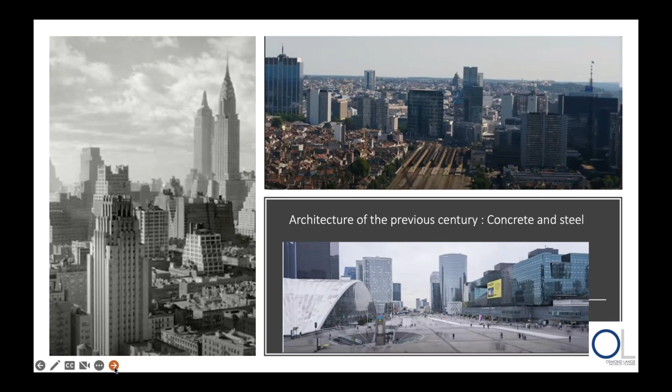These buildings cannot reach zero carbon status in itself and relies on carbon offset schemes elsewhere to improve its rating. So if the industry keeps on producing buildings such as these depicted here, that is, carry on with business as usual, the building industry's lack of attention to global warming would amount to sheer ignorance.

So what building sites should look like in future is this: a fairly new way of building with wood, where the walls, floors and roofs are all wood. This is a construction method that will make a meaningful impact on curbing global warming. So we're going to explore this in the next few minutes.

The reason that this works is quite simple. Trees sequester carbon through photosynthesis and use it as building material for its structure. 50% of wood is carbon. And those of us with carbon fiber frame bicycles will know that using carbon in the structural mix makes for a very light and strong material.

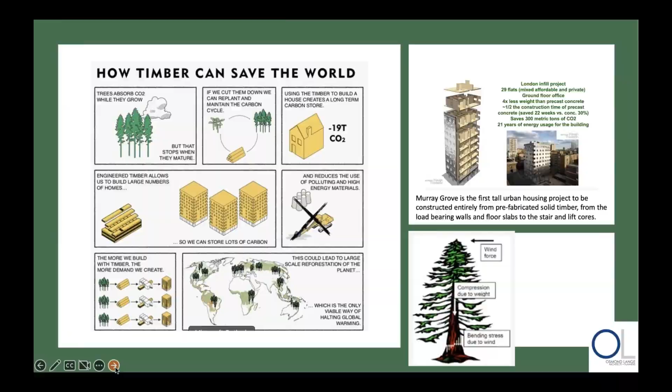To conclude on the sustainability aspects, timber construction addresses the United Nations Global Sustainability Development Goals, promotes development of our forestry industry, creates a new material production industry, and offers wonderful buildings to occupy. It is safe to work with, saves on foundation costs, is 30% faster to build with, and offers a crisply accurate structure. It also streamlines the architectural to production process, as 3D modeled drawings convert directly to the panel and cutting software when applying building information modeling, or BIM, principles.

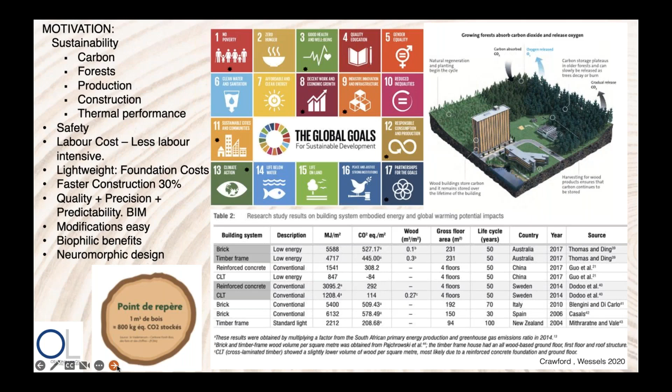The use of timber in buildings in South Africa is not entirely new. The laminated beam industry has been around for decades, as has knotty pine ceilings and shiplap-clad timber frame beach houses. So general skills to work with timber exist, and the adoption of a new timber technology is therefore quite plausible.

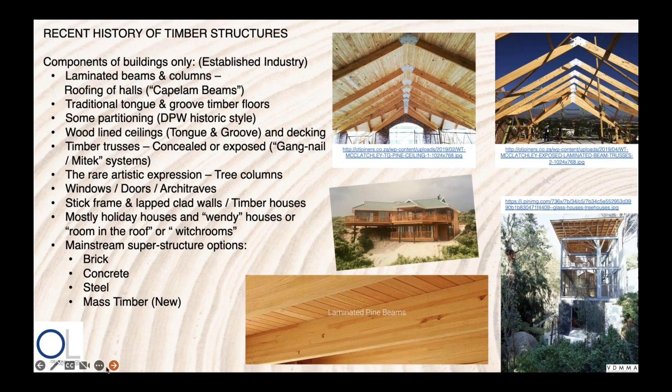However, we are talking about a new product now called cross-laminated timber, which forms one component of mass timber constructed buildings. CLT sheets are made up by gluing timber planks together in 90-degree opposing directions for each layer to form sheets. The sheets are screwed together on site to form the cellular structures that enclose space. Floors, walls, soffit, and roofs are all made of the same product.

It started in Austria in the early 90s with a PhD by Gerhard Schickhofer that was put into practice and has since spread across Europe, America, and Australia. South Africa has a manufacturer, a company in Cape Town called XLAM, and another one is opening soon in Atlantis.

Universities such as University of Stellenbosch and Pretoria are researching this material extensively. The government has taken note, and the Department of Trade and Industry is sponsoring training and other initiatives. The South African Sawmilling Association is also on board. It is an open and democratic new industry starting up, and anyone with any applicable skill is welcome.

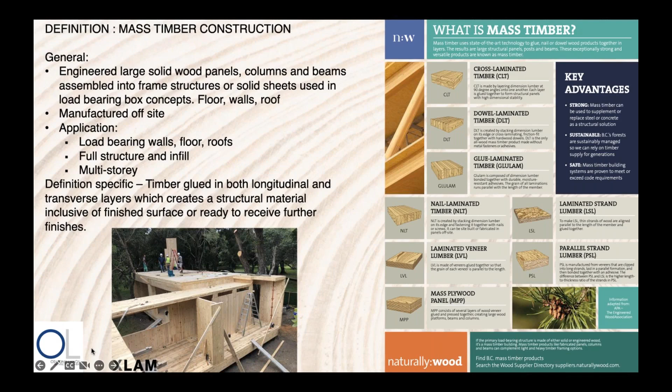Internationally, the trend is, however, to build taller buildings after the International Code Council accepted a classification system for these structures. The system puts it into different fire risk categories depending on the occupancy and escape rationale. Initially, buildings only had a rationale that worked up to 8 stories, but subsequent development now puts it at 18 stories.

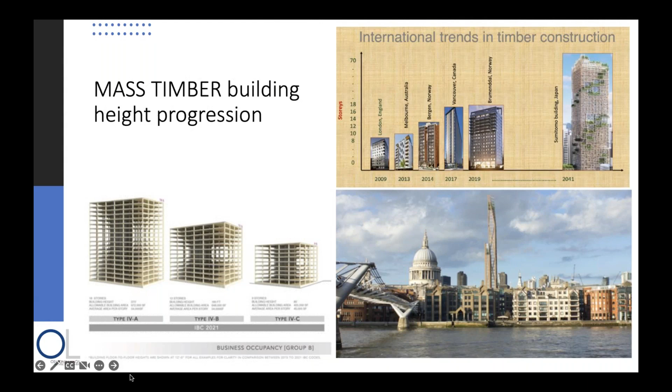So, having spoken the word fire, let's move on to fire. Extensive studies have been undertaken abroad, and the findings all conclude that a 60-minute and up to 120-minute safe building is achievable using CLT. The solution lies in working with the charring rate of the timber.

The char layer that forms on the surface during fire protects the inner layers up to a point in time. The same principle as intumescent paint that carbonizes and protects a steel structure that it was applied on.

So to achieve the time required for stability and integrity, extra sacrificial layers of timber are added. The thickness needed is determined by the expected fire load and resultant time to burn through. X-rated gypsum board cladding is also used as an alternative or in combination with timber sacrificial layers.

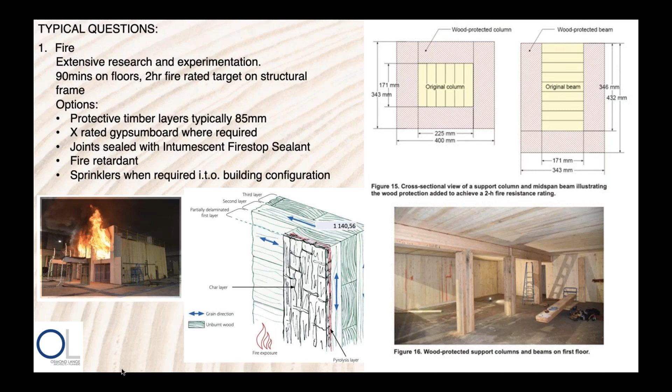And seeing that we are into immediate questions that you might have already had coming up in your mind, let's talk about cost. In a University of Stellenbosch study, comparing a concrete building to CLT in South African conditions, it was found to be only 10% more expensive, taking all aspects into account, especially the speed of construction.

Services are fully pre-planned and coordinated in the BIM model and is then a plug-and-play situation on site. Generally, a 30% overall time saving is usually achieved compared to conventional construction.

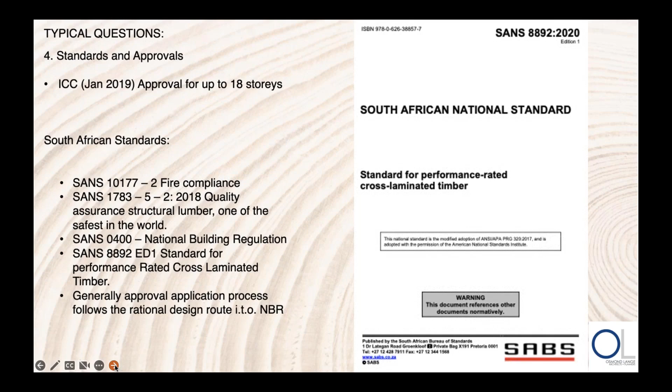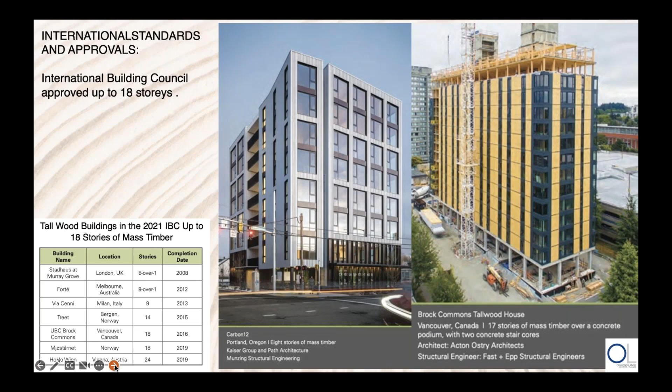The other question, of course, is timber rots, so wood preservation is an obvious concern. The first line of defense is to design the structure to stay dry or to dry out rapidly, especially at the lower levels. External facades are typically clad with a waterproof material of the architect's choice, in addition to preservation.

Universities are undertaking studies in the use of different preservatives with South African wood. For CLT, SA pine and eucalyptus is most commonly used.

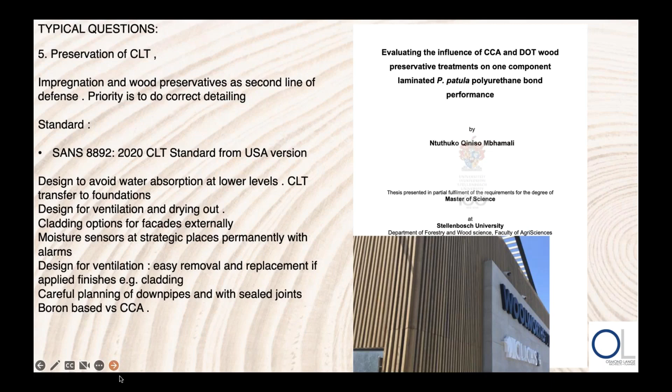The adoption of CLT will be enhanced through various interested parties attending courses and training on different aspects, from design to construction. There is also talk in the industry of getting a private sector-led organization going for information sharing, ensuring standards are met, and to promote learning. This would be similar to the Concrete Masonry Association, or AAAMSA, in the aluminium window and door industry.

So how do we as architects learn how to design CLT buildings from concept to assembly? Publications internationally are free and plentiful. An open source community exists worldwide that you as an architect can tap into. Courses are presented by overseas suppliers, and one of our architects, Carla Jooste, attended such a course in the Czech

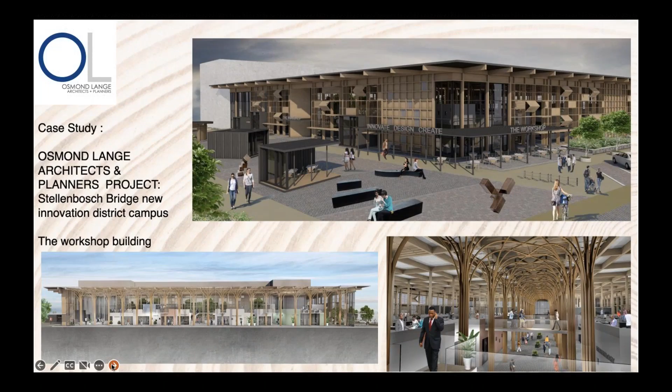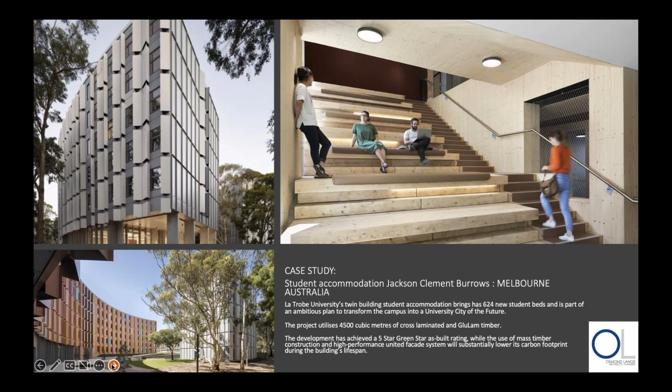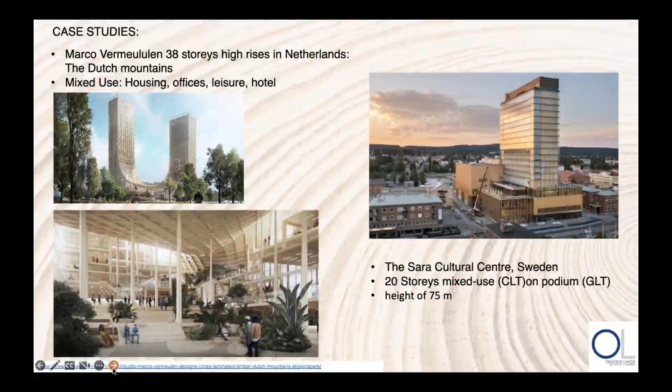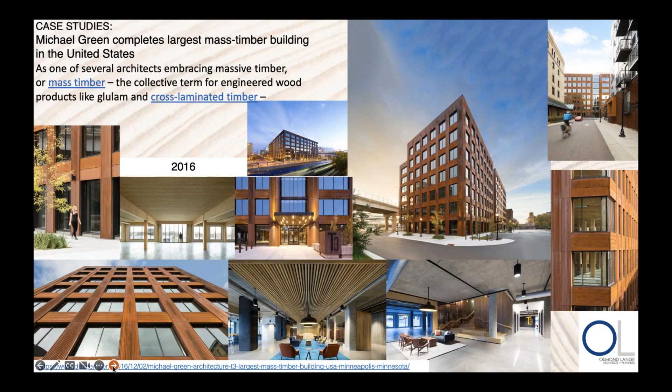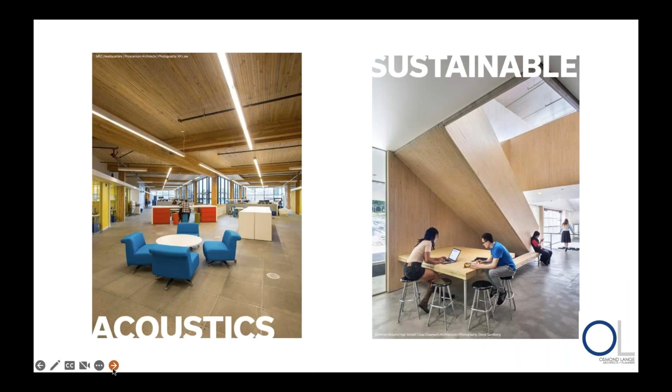So at a conceptual level, what does this material offer an architect? It creates a warm building that is inviting. It's modern. It addresses acoustics. It is sustainable, lightweight, innovative, and versatile, calming, and flexible. So from a design point of view, the architect's imagination can do wonderful things with this product.

We, as I mentioned, are busy with this workshop building, as we call it. This is the interior of it. That is also banking on the concept that in terms of neurological design, a natural environment for people to work in improves their output, as you can see on the diagram on the right. So it has been found that people working in an interior with wood and plant finishes perform better than in a grey and concrete environment.

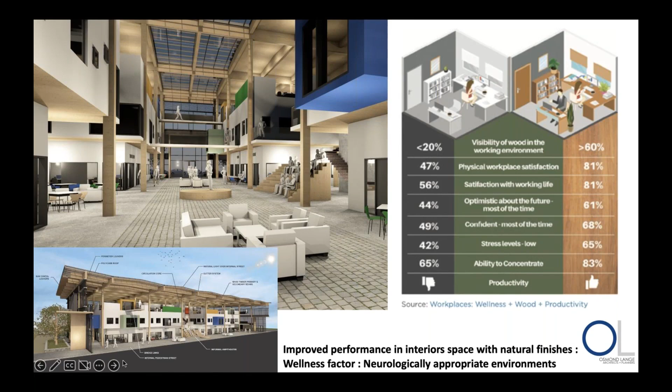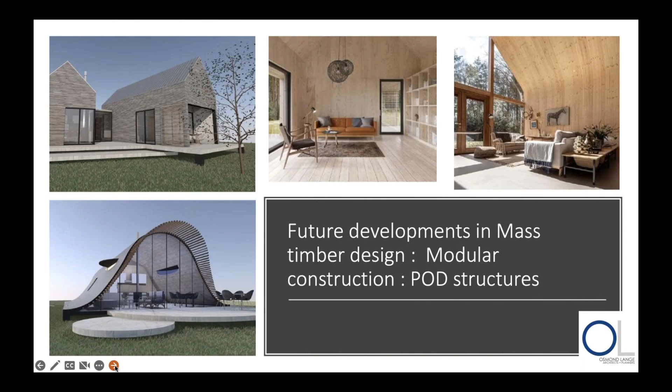The future development where CLT construction is heading is to also incorporate the principles of modular construction, so that more elements are pre-manufactured and installed inside modules before going onto site. In South Africa at the moment, with the building regulations hampering the process a little bit, there's an emphasis on cottage design or smaller structures. So these are examples of work we're doing for a farm in the Winelands, looking at options for visitor accommodation, cottages.

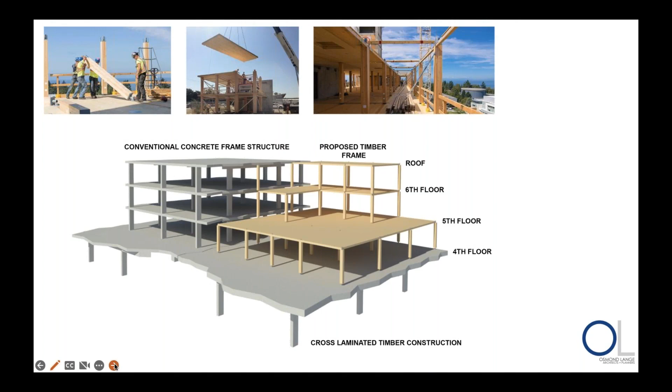This project is the Granger next to the 2010 World Cup Stadium in Greenpoint. It is a mixed-use development that we're busy with. And the idea there is that on the upper levels, some of the floors be done in CLT, as opposed to going the whole hog and starting all the way from the ground. We don't think South Africa is there yet. This project, however, pushed the limits already. On the left-hand side there, you see the new Deloitte building in the V&A Waterfront, where Arup designed these CLT facades spanning over 2 stories, and look, quite a successful outcome.

So, in wrapping up then, we've looked at the history, the international context, advantages, how to learn, how to use it, sources, resources that are available to you. So from an architect's point of view, there's no real remaining reason not to get involved, and everybody is invited.

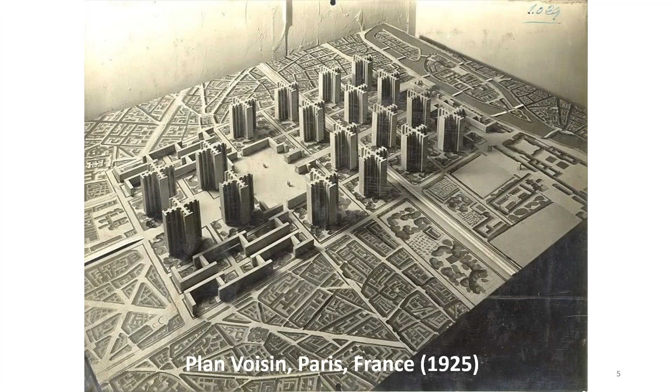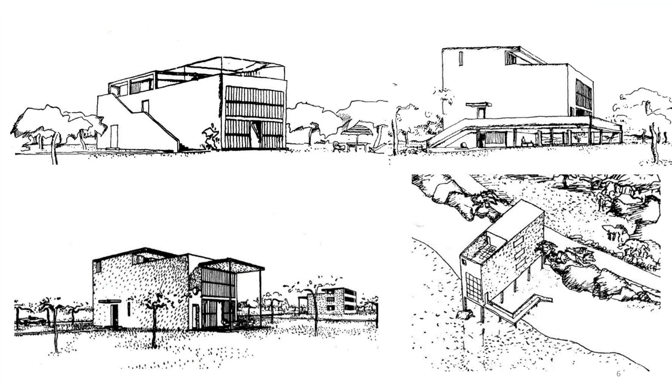We will always write about Le Corbusier, since he confronted design issues that are increasingly relevant today. Le Corbusier has been continuously attacked for his city planning, such as his Plan Voisin for Paris in France. There he proposed that part of the historic city be demolished for his towers in a park. In 1927, he coined the phrase, "A house is a machine for living in." This statement has been misinterpreted ever since. His critics claim he proposed a sterile, robotic setting. But as Le Corbusier explained, I quote, "Baths, sun, hot water, cold water, warmth at will, conservation of food, hygiene, beauty in the sense of good proportion." That is what he had in mind.

Le Corbusier was the undisputed leader of the modern movement in architecture and articulated the only cohesive theories for its implementation. These are the 5 points for a new architecture and the 4 compositional systems. But I'm sure many of you are wondering, how on earth am I going to connect Le Corbusier with regionalism? Let me explain.

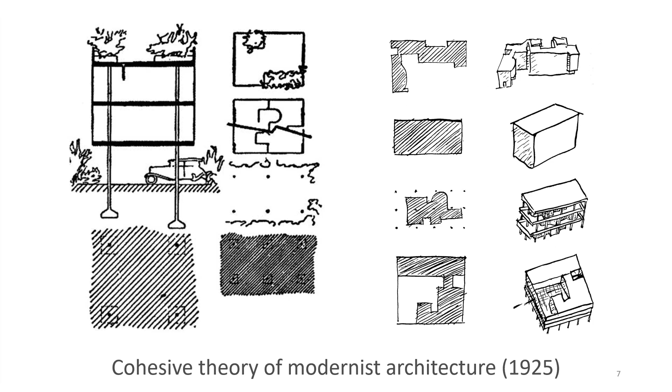Writings on regionalism have been with us for a long time. However, the term critical regionalism was only first defined by Liane Lefaivre and Alexander Tzonis in 1981, 16 years after Le Corbusier's death. The theme has been addressed in a number of important publications, a few of them even exclusively dedicated to critical regionalism. It must be emphasized that the elements of critical regionalism are not well understood. Somebody once wrote that critical regionalism is a theory many architects and their clients might approve of, if only they could remember how to define it.

Diébédo Francis Kéré, born in Burkina Faso, is one of Africa's best-known architects. He is the 2022 laureate of architecture's highest honor, the Pritzker Architecture Prize. His definition of critical regionalism is straightforward. I'm going to read this with you. Critical regionalism is the use of innovative approaches to create an environmentally responsible, climatically sensitive, and culturally embedded building.

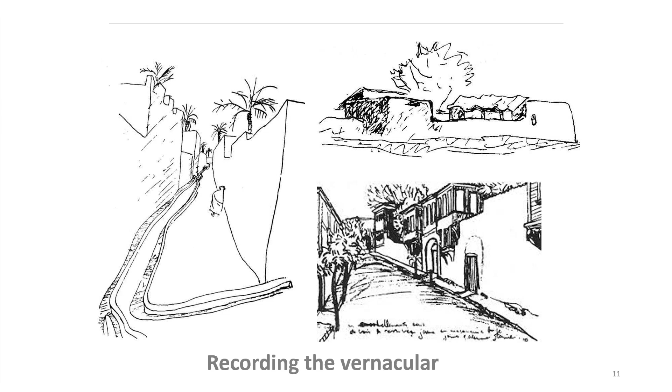Out of the many possibilities, I selected the following case studies. A compound on an agricultural estate in Cherchell, Algeria. Cluster housing at La Sainte-Baume near the French coast. And a new hospital in Venice, Italy. Since they were not built, they have not been subject to the same analysis as his built projects. They are probably also not well known to practicing architects and technologists. I must confess that my choices were rather opportunistic. I really like these projects.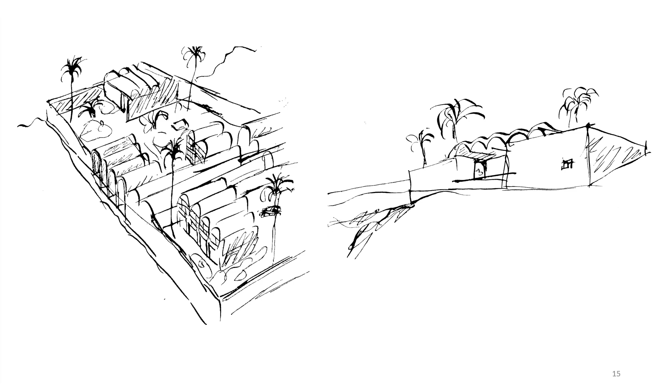Although the drawings are quite rough, it is clear that Le Corbusier developed the design in considerable detail. According to him, quote, the design was based on the interplay of spaces and solids and was intended to reduce the problem, as he put it, to the most fundamental forms of Mediterranean tradition. The section through the compound.

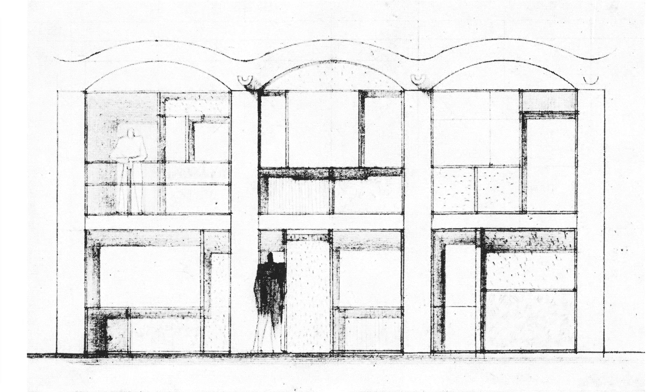Designed in 1942 during the Second World War, there were no specialized craftsmen and building materials were almost unobtainable. For those reasons, it was intended that the building should be constructed by local labor and that local stone should be used for columns and walls. The floors and partitions were to be of wood and vaulted roofs of hollow bricks, also locally made. The wooden end walls may vary between transparent and translucent panels according to need.

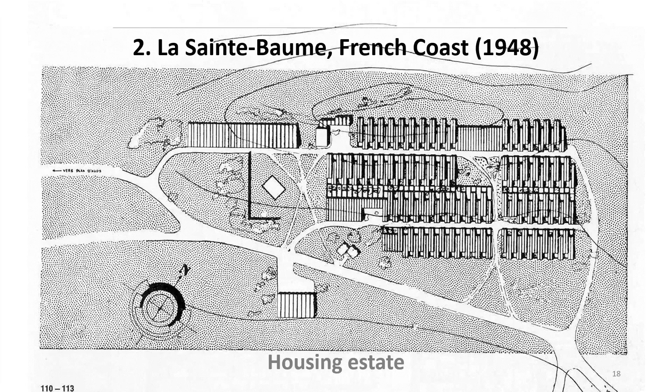The second case study is a housing estate as part of an envisaged project which would have included the Basilica of Mary Magdalene and a Pilgrim's Hotel. It would have been a formidable project. This is my sketch to try and understand the form of the units. Le Corbusier wrote, quote, the means employed were those at the disposal of people who desire to do something but have only the resources of the unfortunate.

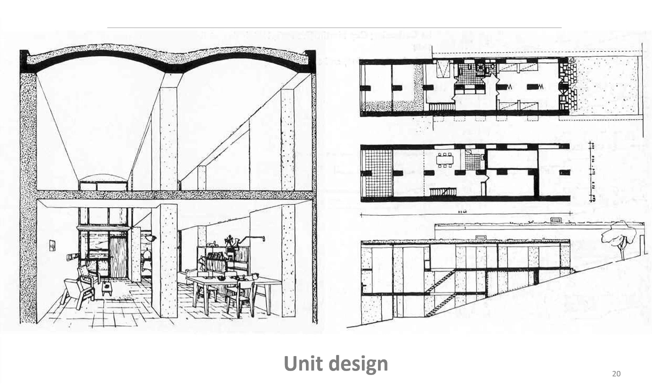The basic structure would have been rammed earth within wooden shuttering. A comment that I find intriguing, and I quote Le Corbusier, life in these rammed earth buildings can have great dignity and regain for man in the machine age a sense of the fundamental human and natural resources. Well, we get the idea, even though the translation from French into English is a bit awkward.

The third case study is a large hospital, 1,200 beds, designed for Venice in Italy. Le Corbusier's words, another quote, by means of the horizontal disposition of the hospital, Le Corbusier, he often referred to himself in the third person, has tried to avoid any influence upon the historical skyline of Venice. The hospital's functions were planned on 4 levels.

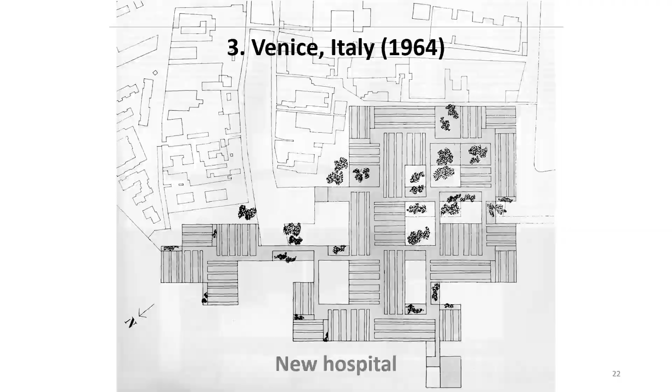This project has been described as one of Le Corbusier's strongest ideas. Here he respected the skyline of the city, conceiving the buildings as a series of low boxes matted together in a complex pattern of overlapping walkways, platforms and spaces extending over the water on piers. The total area was more than 5 hectares, of which approximately 60% was built-up functional space, 15% was circulation, while courtyards comprised 25% of the total.

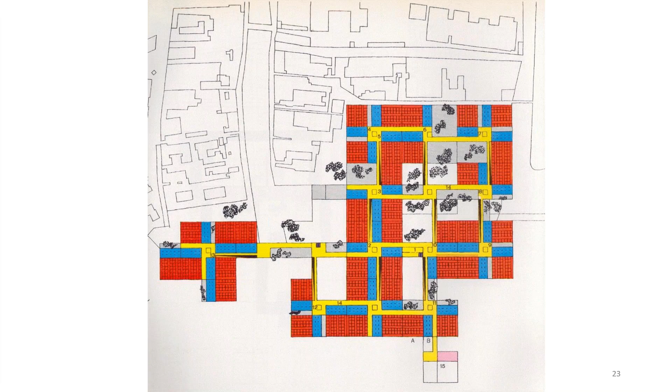In 1985, Tzonis and Lefaivre wrote, I have to quote them, towards the end of his life, his Venice Hospital project reiterated the hopes and aspirations of the younger generation of the 1960s, who demanded a low-profile architecture capable of being integrated into the existing urban fabric.

Now the final section. What can we learn from these projects? What informed the shape of the agricultural compound? The vernacular Algerian village is certainly a possibility. We just don't know because Le Corbusier never revealed such information. Somebody once said he was good at covering his tracks. But in spite of such vernacular and organic roots, he nevertheless applied what he called regulating lines with great care.

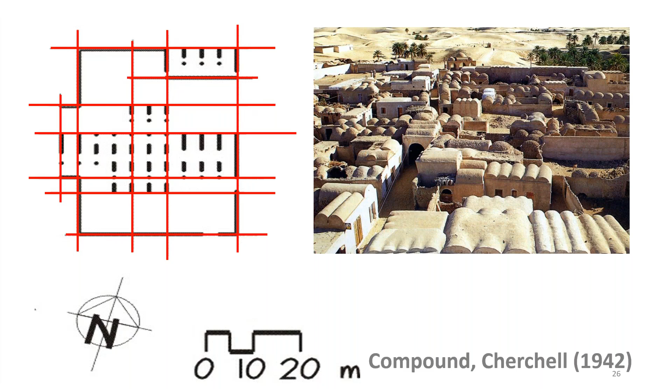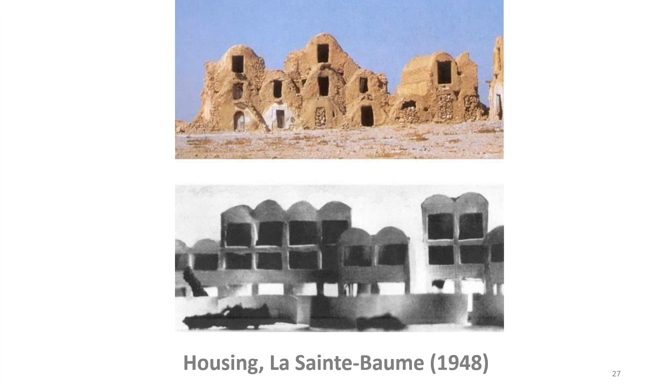The inspiration for the vaulted cellular forms of La Sainte-Baume is more complicated. An author suggested that the Sainte-Baume project seems to be directly derived from the Ghorfa, which is a vaulted structure, often in multi-stories, used for storing grain in Tunisia, on the other side of the Mediterranean. But again, the vault is also part of the vernacular of the Northern Mediterranean.

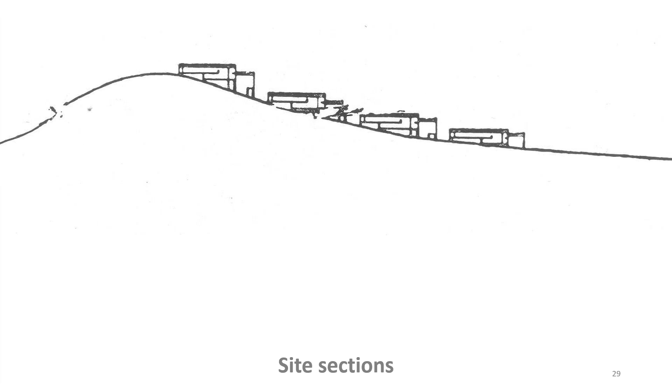We can similarly speculate about the deep narrow spaces. Were they derived from the Neolithic megaron, which later became the main living room in the Greek houses of antiquity, or were they intended to focus on a spectacular view like through a telescope, or were they simply derived from the typical Mediterranean vernacular?

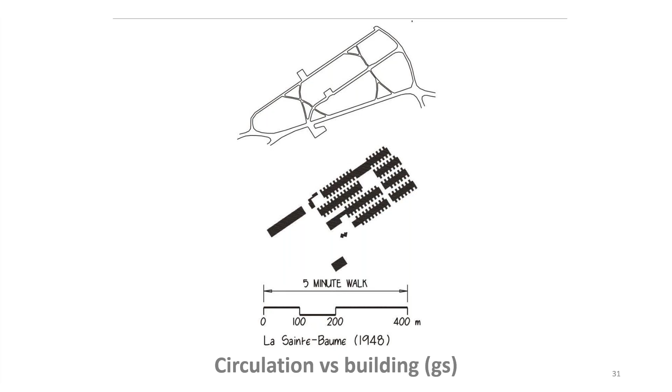Whereas the paths are organic, the building layout is more formal, but only a proper analysis revealed the configuration. Le Corbusier was obsessed with proportions, specifically the golden section, and at La Sainte-Baume he applied it rigorously. This is my analysis. Golden sections everywhere.

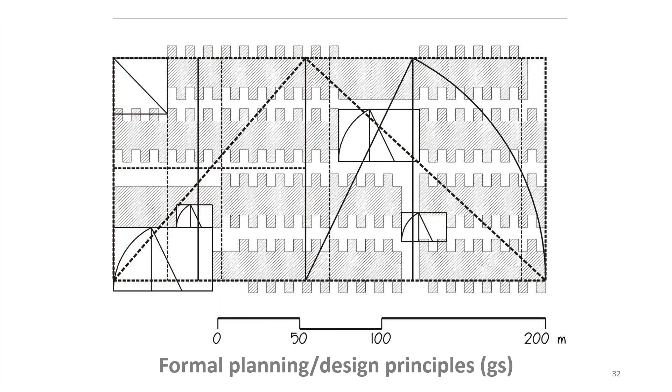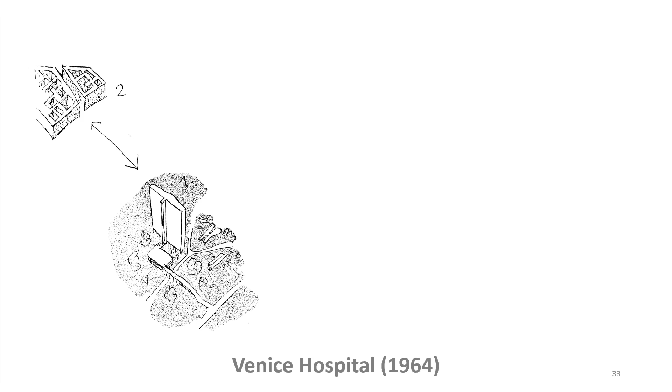In 1947, while he was involved with the United Nations headquarters in New York, Le Corbusier argued in favor of vertical garden cities. So his carpet plan for the Venice hospital must have been a great surprise to his detractors. Although also in 1947, he wrote of Venice as follows. Today, Venice is still our teacher. Classified circulation, supremacy of the pedestrian, the human scale. With classified circulation, he probably meant hierarchy of circulation. His response to historic fabric is radically different from the way modernist buildings were conceptualized at that stage.

Venice. The carpet pattern and the configuration of circulation and enclosed and open spaces were clearly very, very innovative. Or were they? Timgad was a Roman city in the mountains of North Africa, founded around 100 AD. Each of the hospital's modules was as big as 4 Roman city blocks. So we can only speculate about Roman colonial settlements as sources of inspiration.

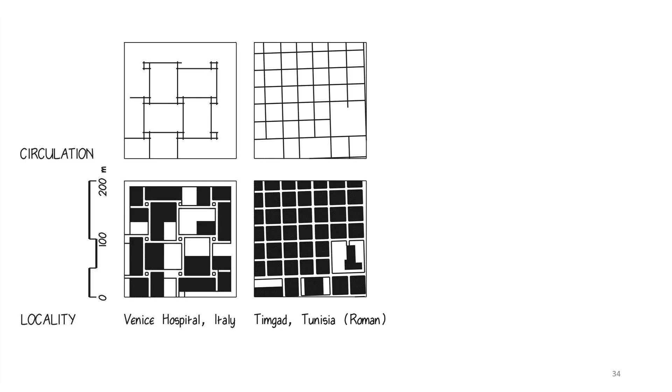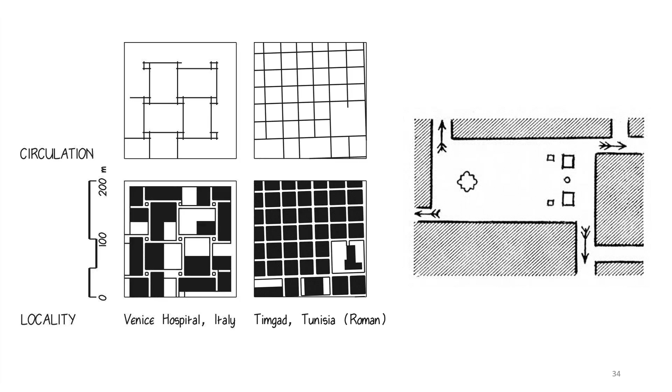What is much clearer is that he modeled the intersections of circulation routes according to the pattern Camillo Sitte recommended in his book on city planning in 1889. This is my drawing to analyze the project.

William Curtis, a well-known author, wrote in 1986, I quote again, Le Corbusier's detractors have never ceased to bicker about his supposed insensitivity to urban context, but both Venice Hospital and La Sainte-Baume were based on the reading of underlying typologies in existing towns in terms of both buildings and spaces between.

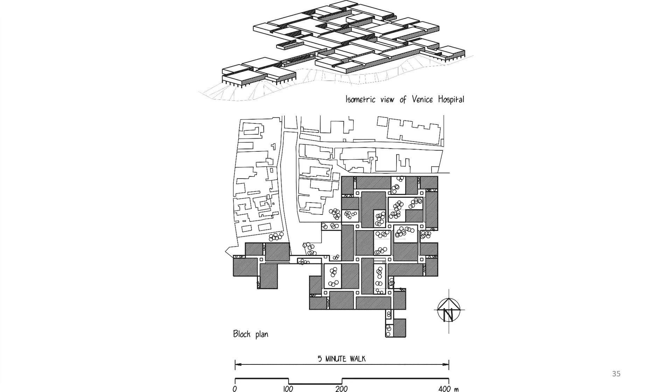Secondly, climatically sensitive. He adapted existing patterns of openings and shading, also used courtyards to moderate the climate. And thirdly, I'm jumping ahead, culturally embedded buildings. Here we find that the small scale and density of the Mediterranean vernacular is emulated, and so are the narrow lanes and alleys, while courtyards serve as social spaces.

Finally, Le Corbusier's carpet buildings introduced a new modernist paradigm. Instead of buildings in a park, we now have parks inside buildings. That paradigm influenced a generation of architects, practicing as well as academics. Let's summarize. Vernacular architecture is essentially a regionalist phenomenon. Postmodern copying can, under certain circumstances, create a sense of regional space.

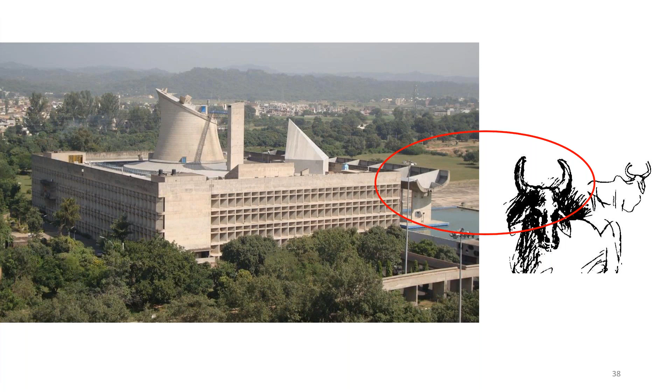In conclusion, in many of his designs, he also interpreted regional images artistically in a sculptural sense. But that is outside the scope of this presentation. Finally, after years of studying Le Corbusier and visiting many of his projects, including Chandigarh in India, I concluded that critical regionalism is essentially post-World War II Corbusian modernism by another name. Personally, I am continuously amazed at the subtlety and depth of his creativity.